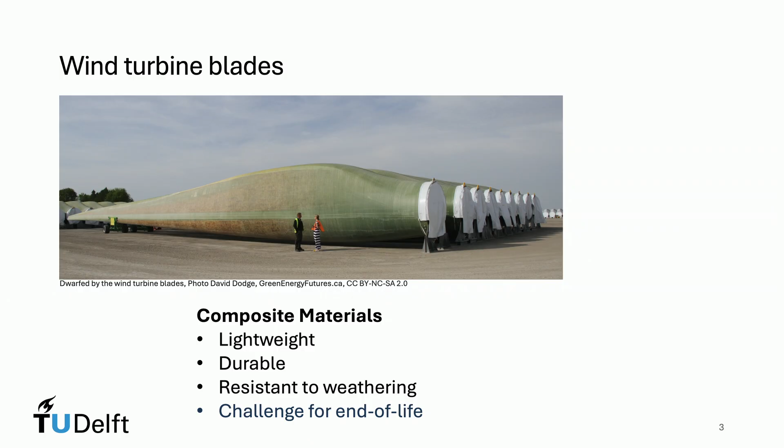Let's start at the highest and most desirable level, lifetime extension. Wind turbine blades are designed to last for around 20 to 30 years, but there are opportunities to extend this through proper maintenance, inspection, and repair. By investing in proper maintenance, small repairs can be made to prevent larger, more costly damage. For instance, coatings are reapplied to improve durability, and routine inspections can identify early signs of damage or wear, allowing for preventive maintenance. In some cases, parts of the blades can be repaired, such as patching cracks or reinforcing sections that may have weakened over time.

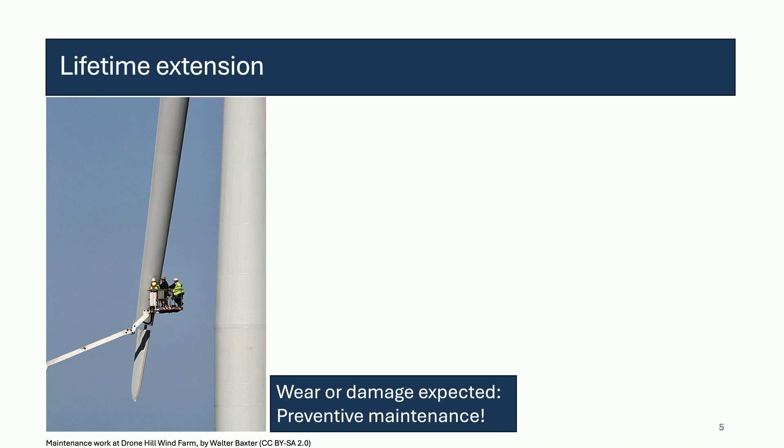And what if we could design future blades in modular sections rather than one large structure? Then we could use the full potential of repair and maintenance by taking out sections that have damage and replacing them with new ones. Once the turbines reach the end of their economic life, they are often dismantled.

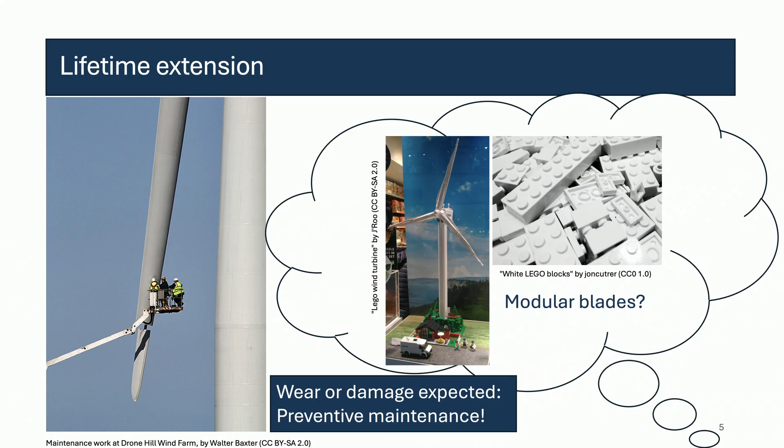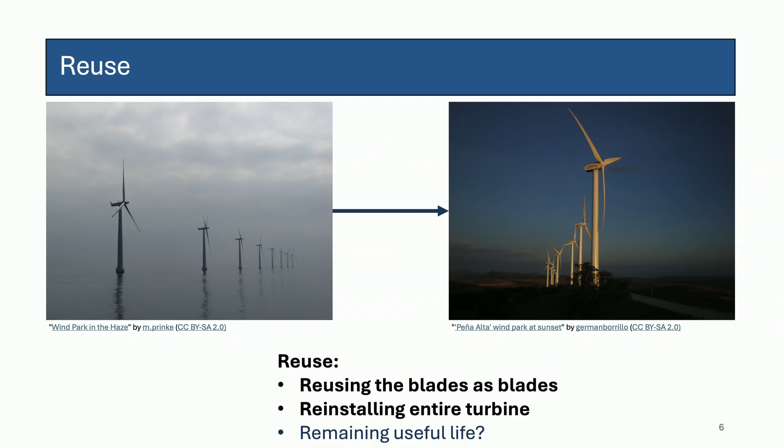This brings us to the next stage in the R-ladder, reuse. Reuse refers to reusing blades as blades, for instance on another turbine, or reinstalling the entire turbine somewhere else. This approach could apply to wind farms where turbines are decommissioned after many years of operation. In this case, it would be important to know the remaining useful life of the blades, and could involve refurbishing blades by making modifications to extend their operational life.

We now move to the next R on the R-ladder, which is remanufacturing. That means that we use parts of a discarded blade into a new blade. We do that by disassembling the old blade and reusing parts into a new blade. For remanufacturing of blades to work, we need to work with materials or parts that can easily be separated from each other, while still keeping their functionality.

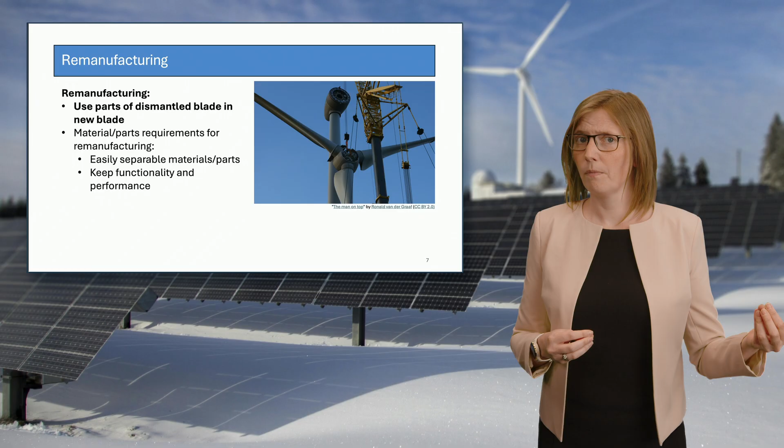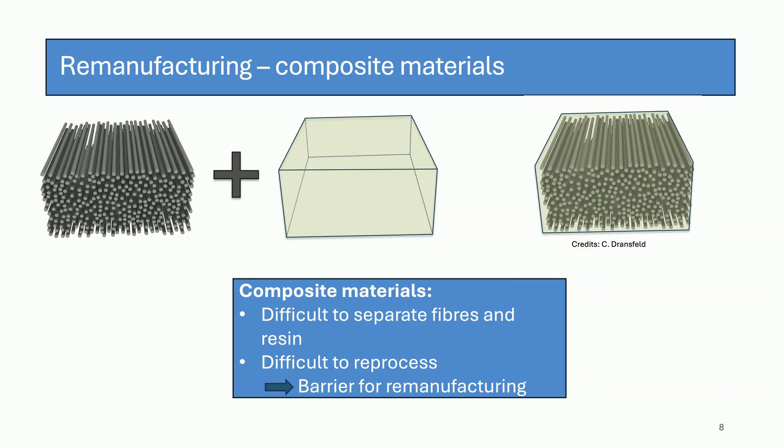The thermoset matrix undergoes a non-reversible chemical reaction during manufacturing and makes the blade maintain its shape during its lifetime. The resulting composite material becomes very difficult to separate and reuse without sacrificing its mechanical integrity. The fibers, and especially their length and orientation, must be preserved for the material to retain its performance, which creates a trade-off between the mechanical properties and reusability.

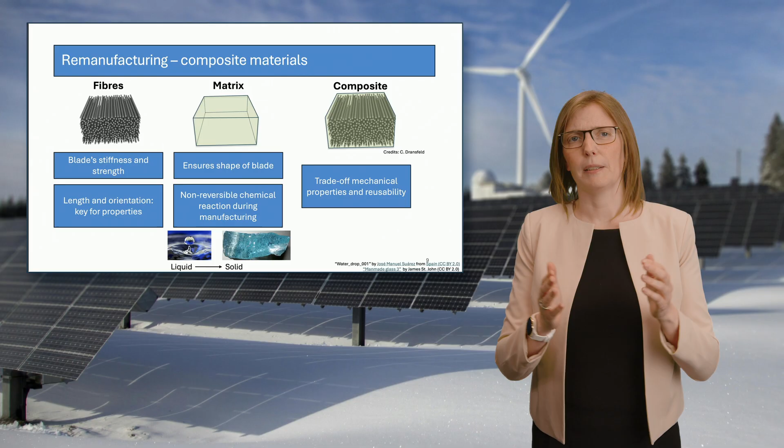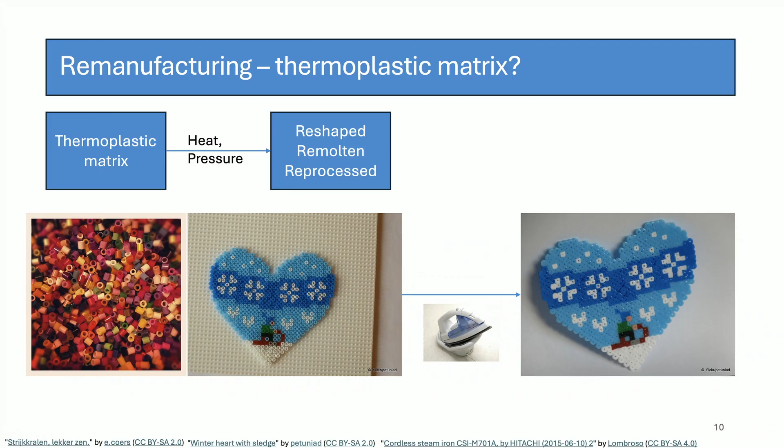One innovative approach being explored for the remanufacturing stage is the use of thermoplastic matrices, which have reversible properties. By applying heat and pressure, they can be reshaped, remolten, and reprocessed after the blade has reached the end of its life. This allows for the reuse of the materials without compromising the strength of the original components.

To address the challenges of composite materials in wind turbines, we need to rethink how blades are made from the outset. This involves selecting alternative materials that allow for modularity in the blade design, that can easily be repaired, can be remanufactured after their lifetime in the blades into new materials for blades or other products, are more recyclable, or that can be separated more easily at the end of life.

What we can't forget is that the blades that are decommissioned now are probably 3 to 4 times shorter than the ones that are used today. So for remanufacturing to work, we would definitely need a material that can change shape after its lifetime in the blade. Thermoplastic matrices, for instance, could allow blades to be more easily disassembled and the materials separated for reuse and recycling.

Let's take a look at the fourth stage, repurposing blades. This refers to finding new applications once they are no longer suitable for their original function as a blade. For instance, wind turbine blades are being repurposed for various infrastructure projects, including bridges, sound barriers, playgrounds, or public art installations. Their strength and size makes them excellent candidates for these types of projects.

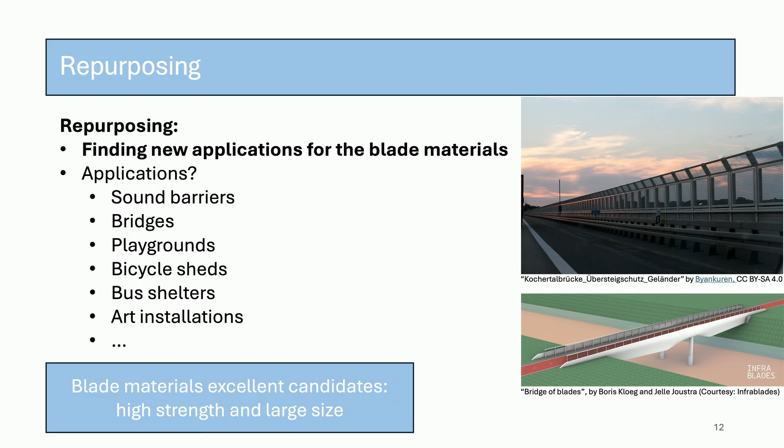Finally, we arrive at recycling. Recycling is the last step in the R ladder and is another challenging stage for wind turbine blades. The composite materials in blades are extremely durable, and this durability also makes them difficult to recycle. Different research strategies are being followed to tackle this.

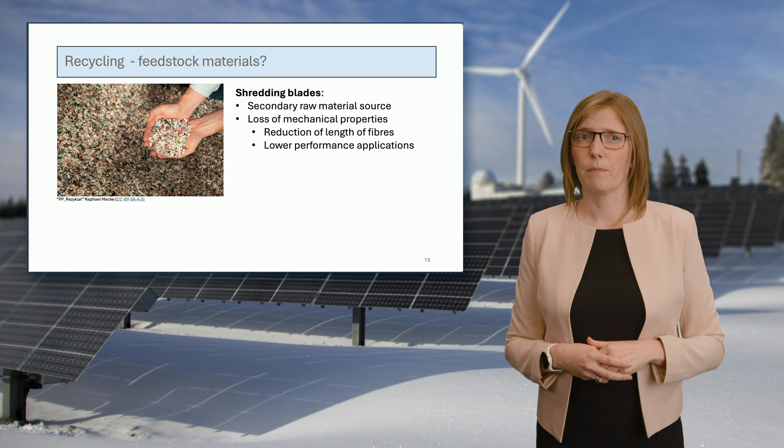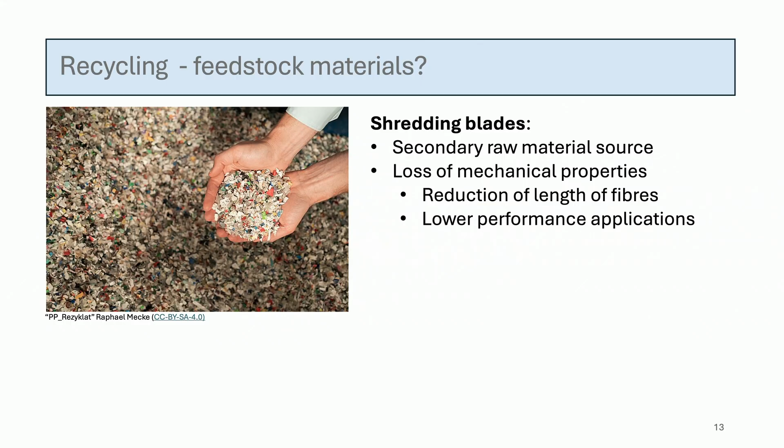In some cases, shredding blades into smaller pieces has been used to create secondary raw material sources. This process can result in a loss of the original material properties due to the reduction in the length of the fibers. The recycled material, therefore, is not very suitable for high-performance applications.

Another area of interest is the use of natural fibers, such as flax, bamboo, hemp fibers, as reinforcement for the blades. They capture CO2 during their growth and are more biodegradable at the end of their life. This comes at a price of the lower mechanical properties of these fibers.

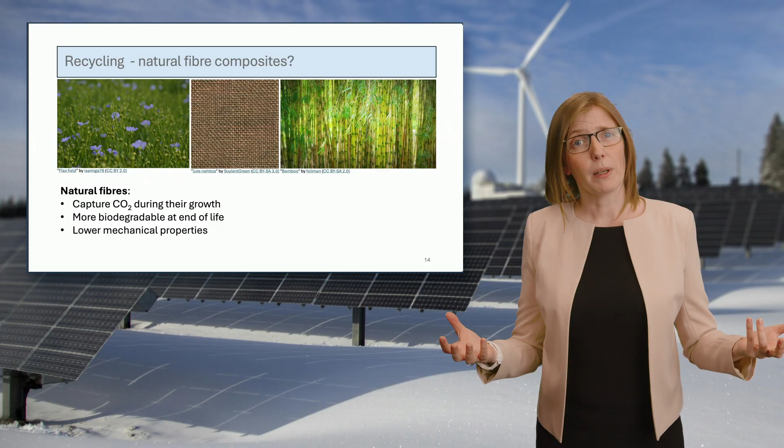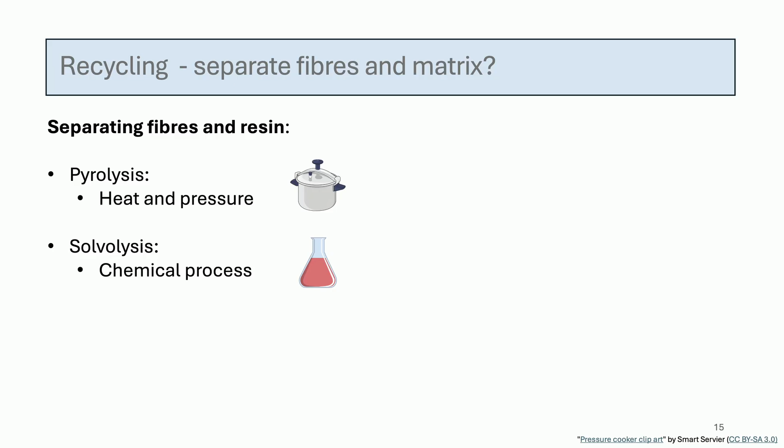When we really want to start separating the fibers from the matrix they're embedded in, there is promising research into methods like pyrolysis or solvolysis. Pyrolysis uses heat and pressure to break down materials and separate matrix from fibers, enabling more efficient recycling. Solvolysis uses chemicals to break down the matrix around the fibers. Both processes result in chemical building blocks for new matrices and lower fiber properties.

Though these processes are not yet widely implemented, they could hold some potential for improving the circularity of wind turbine blades.

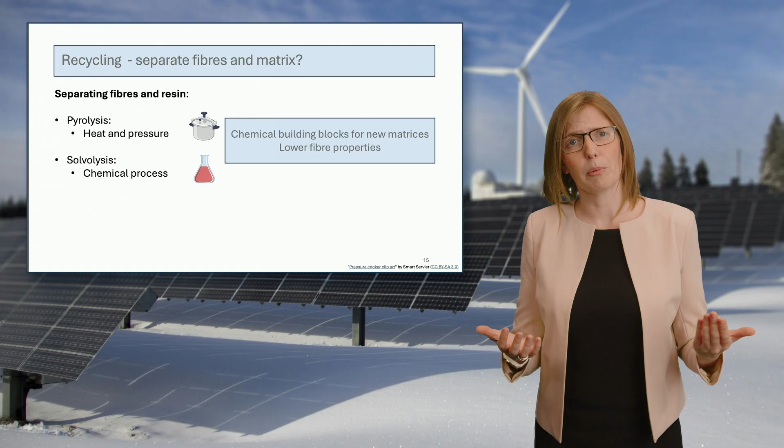As we have seen, extending the lifetime of wind turbine blades, reusing, remanufacturing, repurposing, or recycling them all involve significant technical challenges. But there is also considerable potential for innovation. By improving life cycle management, rethinking blade design and the material choices, and advancing recycling technologies, we can help make wind turbines more sustainable and circular.

The research and development in this area is ongoing, and there's much to look forward to as new materials and new ideas are taking the spotlight.